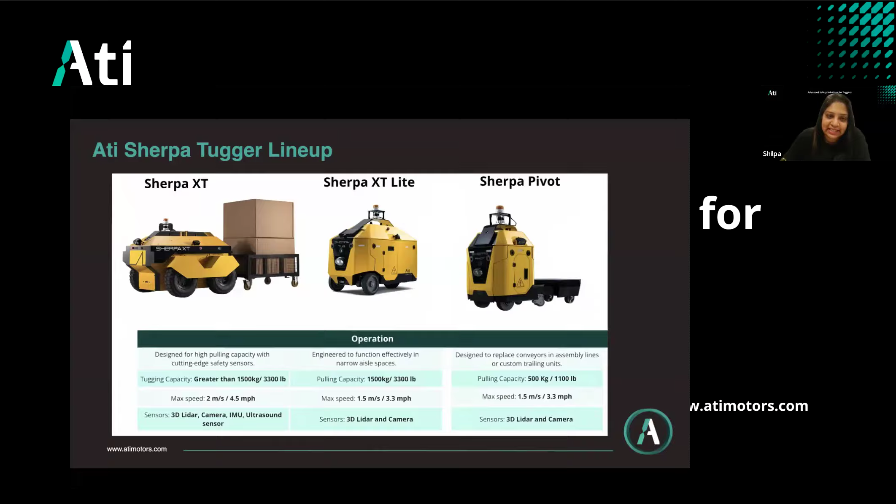Introducing Sherpa Pivot. Pivot is our mini tugger, which can handle a payload of 500 kgs. And Sherpa XT, can you hover over XT, Suprotim? This tugger will be able to carry payloads of more than 1.5 ton, to be precise, 1500 kg and greater. Now, with the introduction to our tugger family, I hand over to Suprotim. Please take over.

All right, thank you all for joining this afternoon. I'm going to try and keep it within about 35-40 minutes. Just so that everyone is familiar with the terminology we will use throughout the webinar, I will do a quick 101, including some of the topics we spoke about last time. As Shilpa mentioned, we have a variety of tuggers available in our lineup, and they all run on a whole bunch of sensors.

There's a 3D LiDAR, which is the main sensor that we use for our autonomous driving. But we also have other additional sensors that help clear some of the blind spots that we have, or to perceive obstacles and other things in the blind spots that we have.

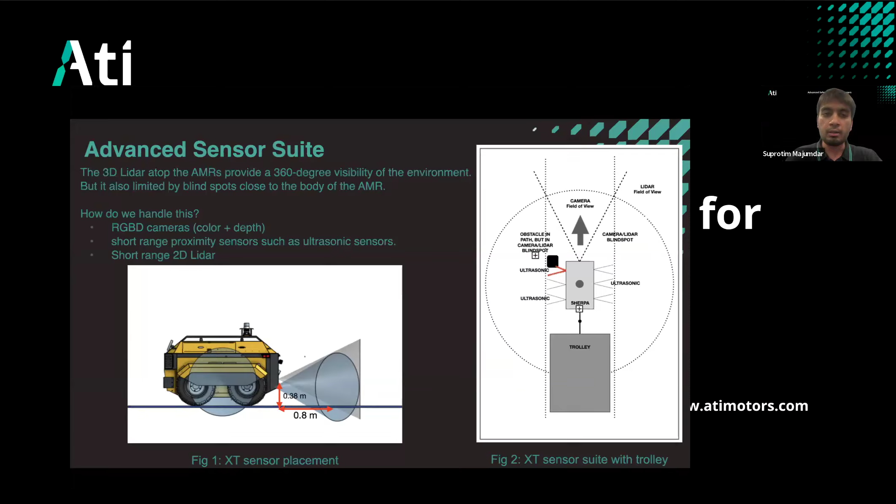Right? And just a brief on autonomy itself. Basically, for any autonomous robot to go about its business in any environment or a factory or a warehouse, we need to answer 3 very fundamental questions, which are: where are we? What is around us? And what do we do next? Where do we go? How do we get there? Etc. Right? So to answer the first question, we need to know where we are in that particular environment.

So with the set of sensors that we have, the 3D LiDAR primarily, we build a map of the environment. And as we move through the environment, we localize, which basically means we take a scan of the environment and match it against the map that we have created. And with some fair amount of accuracy, we know where we are.

Then, of course, we need to move. And before we move, we need to know what's around us. Is it safe for us to move? How much space do I have to move? And what other obstacles do I have to deal with when I move?

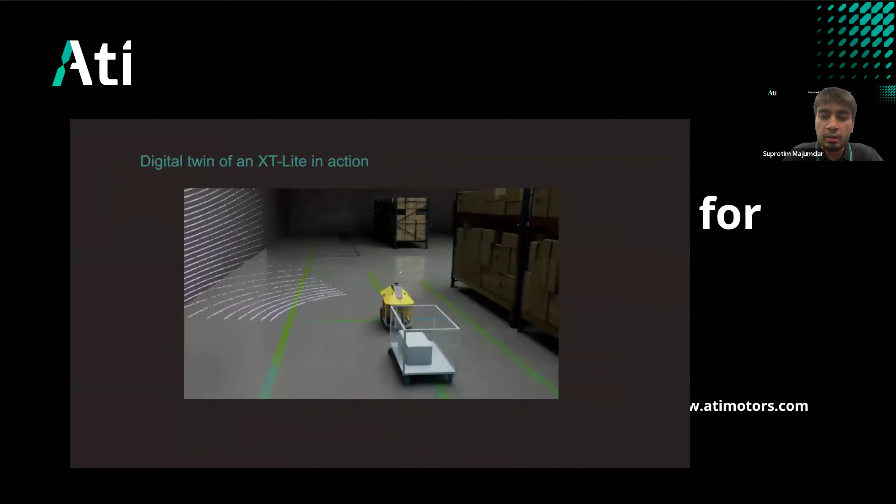All right. Cool. So just wanted to show whatever we talked about in action. You can see the beams of the LiDAR. This is, I think, a 32 beam Ouster LiDAR. As the robot moves, it localizes. It's in this warehouse environment. It's able to perceive all the stacks, the trolley behind it. If you notice very closely, you can even see some vehicle dynamics at play.

This is the Isaac Sim simulation environment developed by NVIDIA. You can see the wheel of the trolley rotate around, so you're getting real world physics simulated as well. This is a great tool that we use to develop our software stack. And you can see the vehicle moving around doing its thing.

All right, so now to the heart of the matter. Tuggers. So what's so special about tuggers? Well, tuggers, as the name suggests, tug trolleys, and trolleys are tough. They provide a whole bunch of challenges. There is a wide variety of trolley form factors that robots have to deal with across environments, factories, and warehouses. They come in multiple configurations.

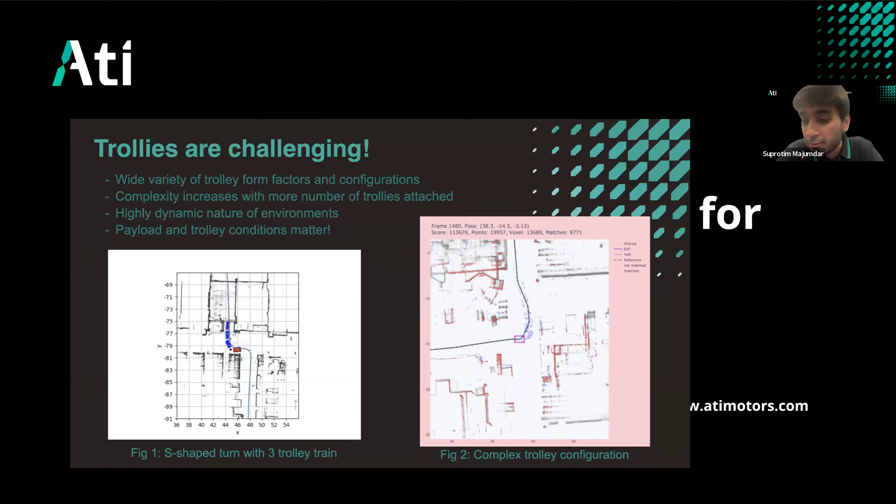Yeah, okay. So in figure 1, just for everyone's clarity, the vehicle is in red and it's pulling 3 trolleys. It's taking this S-shaped curve, and you can see the paths that the trolleys themselves take are quite different from each other. So that itself is quite a challenge. But 3 seems quite trivial compared to the 12 trolleys that we are pulling in figure 2.

So this is 2 rows of 6 trolleys, so a total of 12 trolleys. And you can see, especially while turning, they are taking quite a wild trajectory around the corner. And that obviously is quite a challenge.

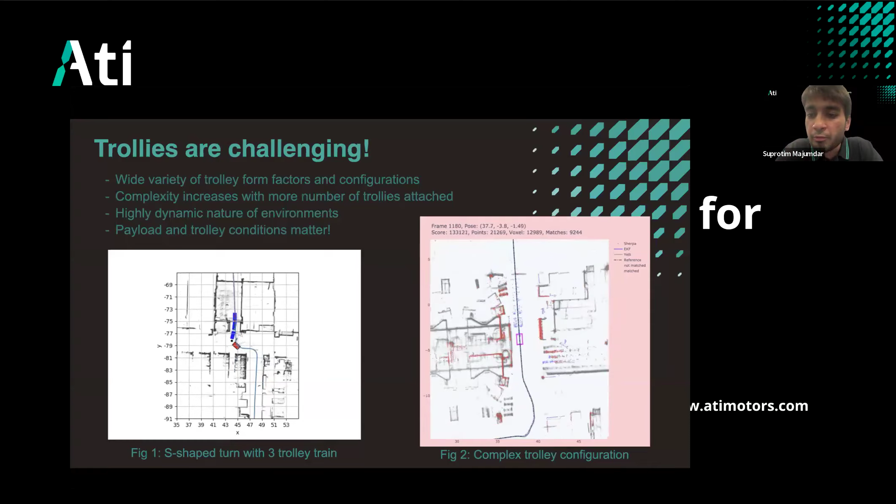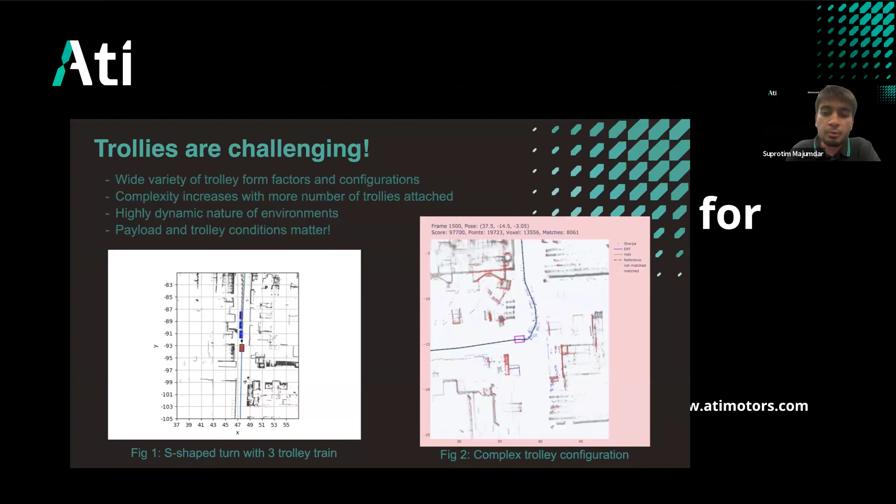And as you can see here, the LiDAR is able to see the first couple of trolleys fairly distinctly. But as you approach trolley 11, 12, I mean, even the third row of trolleys onwards, the set of points are very sparse. So it's difficult to see the trolleys. So these are some of the challenges that we have seen over the years.

So as I mentioned in the last slide, it's difficult to even see the trolleys. And the reason we need to see the trolleys is because once you know where the trolley's position is, that's when you can start to apply some of our safety algorithms, etc. So the first step is always detection.

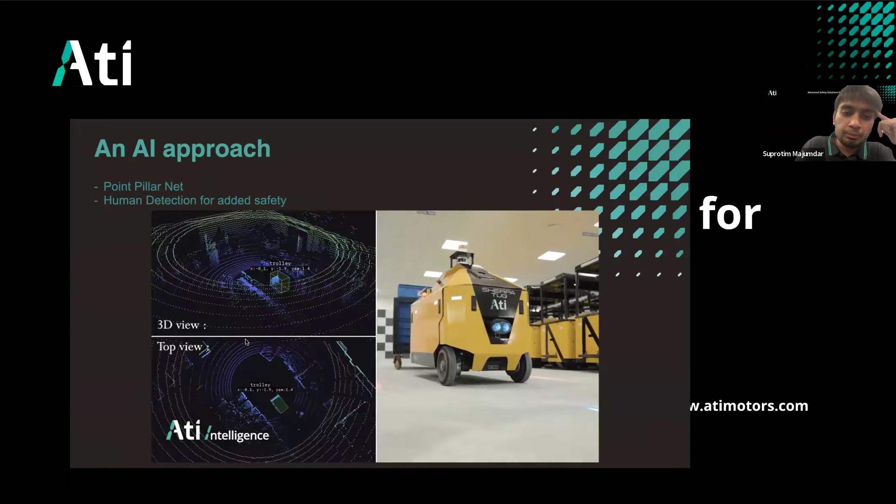So another approach, of course, is to use AI. In this case, we are using a neural net called PointPillars, which is able to filter out noise a lot better, and it is able to classify these trolleys a lot better than a simple scan match could. Because for the scan match, I need to know certain details about the trolley mask: the length and width, the signature of the trolley. Here it is a little more generalized. That is the beauty of AI and ML.

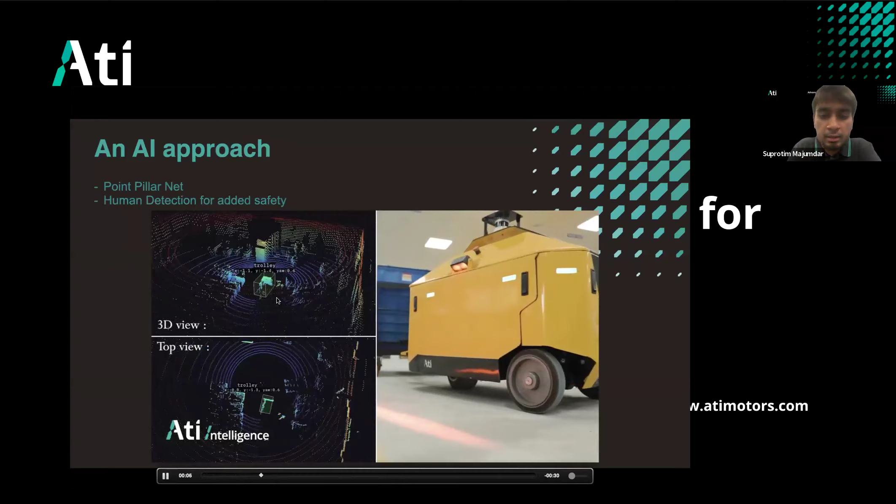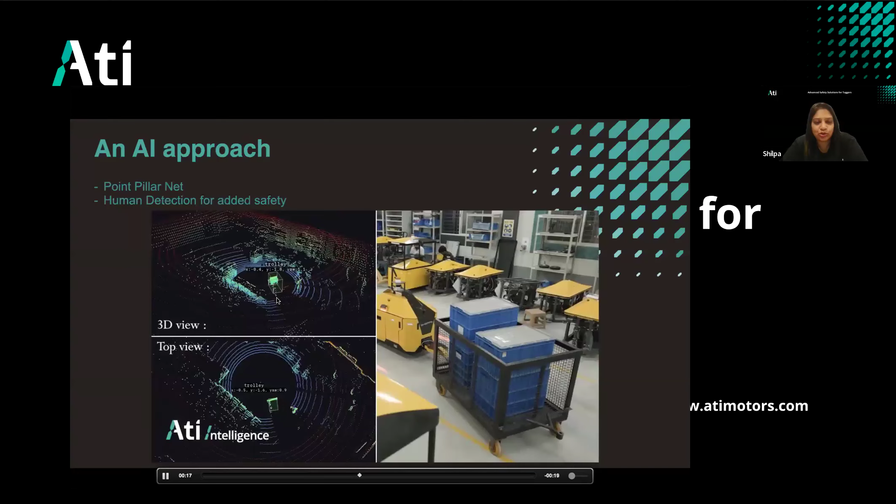So here you can see that it not only does a great job of detecting the trolley, but it is also able to classify the person as well, the human. So it is able to do human detection as well. The benefit of that is we can change the behavior of the vehicle, or adapt the safety layer of the vehicle to be more cautious if there is a human seen near the trolley. So all these red marks are not just obstacles; it can also detect which is human and which is just an obstacle.

So whereas in the last slide all you see are a bunch of lidar points, here you are getting a nice bounding box of the objects that you have been able to classify. So you can classify a trolley versus a vehicle versus a cart versus a human. That gives you a lot more information. It gives you semantic information. So now you know not only that there is a bunch of obstacles there, you know what that obstacle is.

And that allows us more freedom to apply other techniques to be safer and to be more efficient in terms of our path planning. That's wonderful. Okay. Right. So I'll just show you a top view and a side view of the same. You can see that there is a convolutional neural net that we use. That is the backbone of PointPillars net. And it just takes in point cloud data from the LiDAR, and it spits out whatever it has classified. So trolleys, carts, humans, etc.

So you can see here that the person has come between the vehicle and the trolley, and the vehicle immediately stops. Yes. And then once the person is gone, it goes about its business again. Okay. All right.

And so now that we have looked at trolley detection, what do we do with that? We have to do something, right? So first and foremost, if you do see that there is an obstacle that the trolley is expected to hit, you probably want to take the safest bet and stop. So if you look at figure one, you can see again in pink, the vehicle is moving along a certain path. And behind it is a much wider trolley that is in the yellow boxes that you see. And you can see a big black circle. That is an obstacle that we have detected.

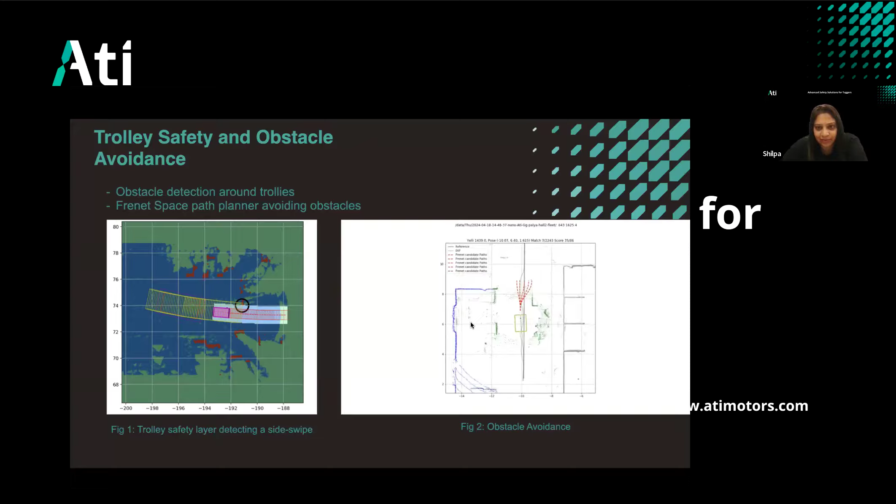So the path is a straight line path. It is just going north to south and back. And there is some box kept right now to its left-hand side. So it just detected that and it was able to find a feasible path around it, a safe, collision-free path around the obstacle. Okay. Right. And you will see the same here.

So basically, like I said, there was a straight line path that was predetermined for the vehicle to follow. But as and when it sees an obstacle, it has a bunch of paths that it basically optimizes over in terms of obstacle distance and of course kinematic feasibility, and it chooses the optimal path to get around the obstacle. And when it is free, as you can see in the video below, it rejoins the path.

So here you can see that it is tugging a fairly largish trolley and gets back only when the trolley is safe around the obstacle. So it goes on for a few meters and then rejoins the path back. Right. This picture is clearer; it added more clarity to the previous slide. Yeah. I think the previous slide didn't have a trolley, and this one has a nice distinct trolley that you can see. Correct.

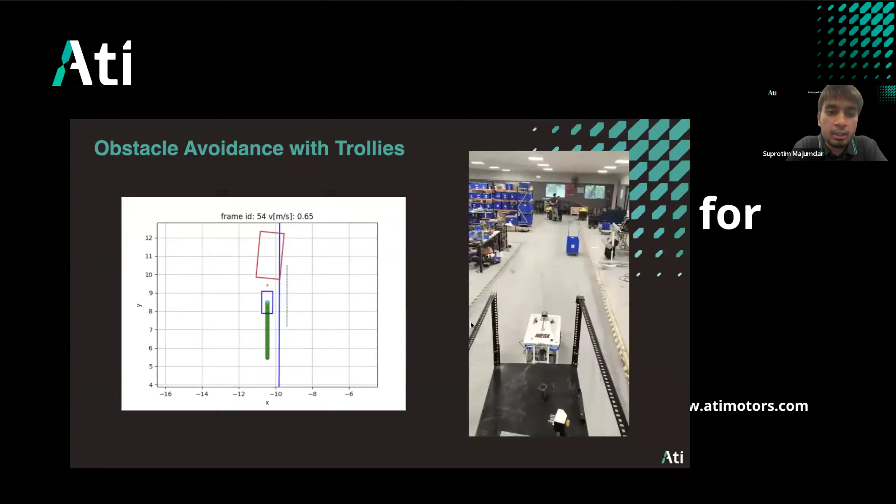All right. So here's our testing facility in Bangalore, along with a visual representation on the side. You can see the trolley is much wider than the vehicle, but the vehicle is accounting for the trolley and making its way safely around the blue box that has been placed in the path. Yes.

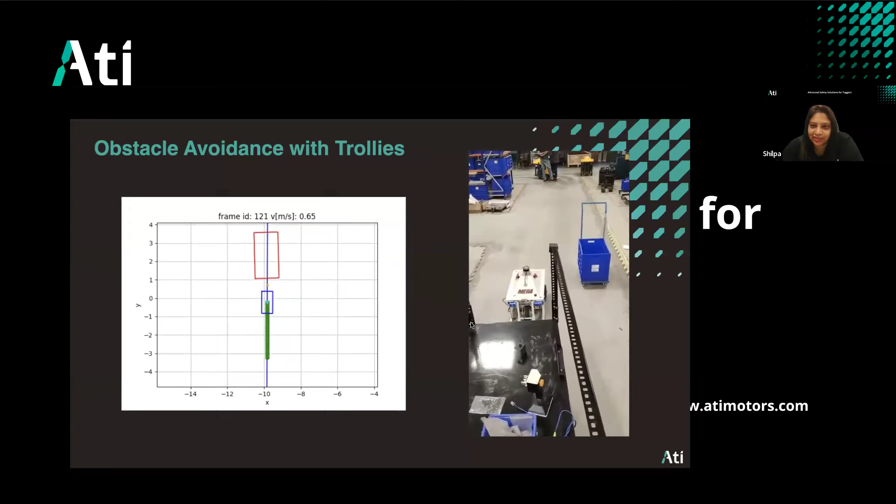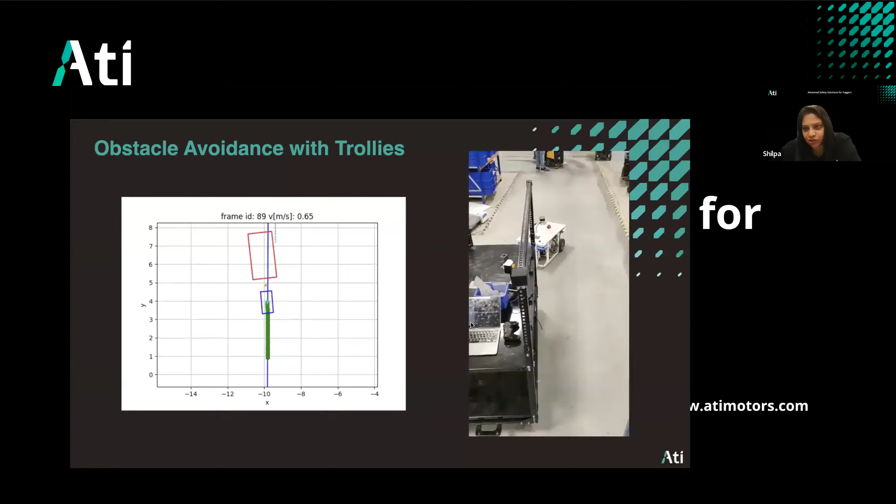So good. Right. So, any questions about obstacle avoidance and trolley detection? Yeah, I do have some here. If something comes between the trolleys, then what is the safety precaution for the same? I think we just saw in the video how a guy came in between the trolley and the vehicle. Okay, here this guy is asking between the trolleys. Yeah. All right.

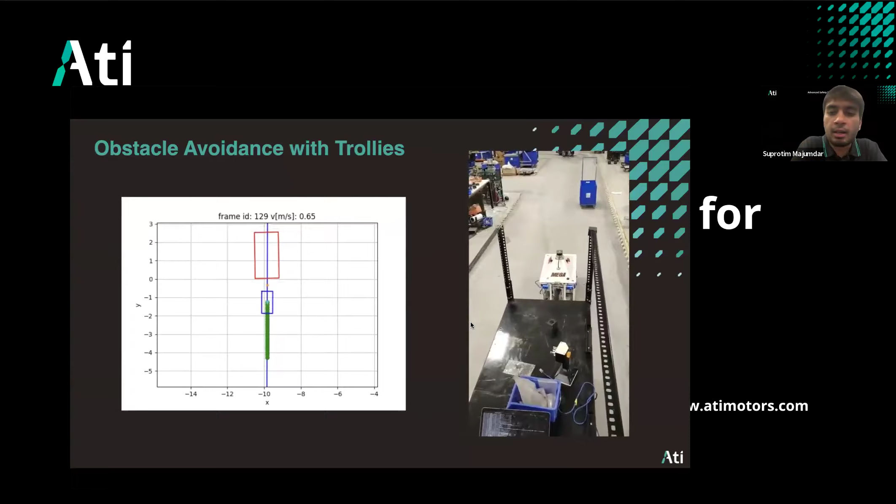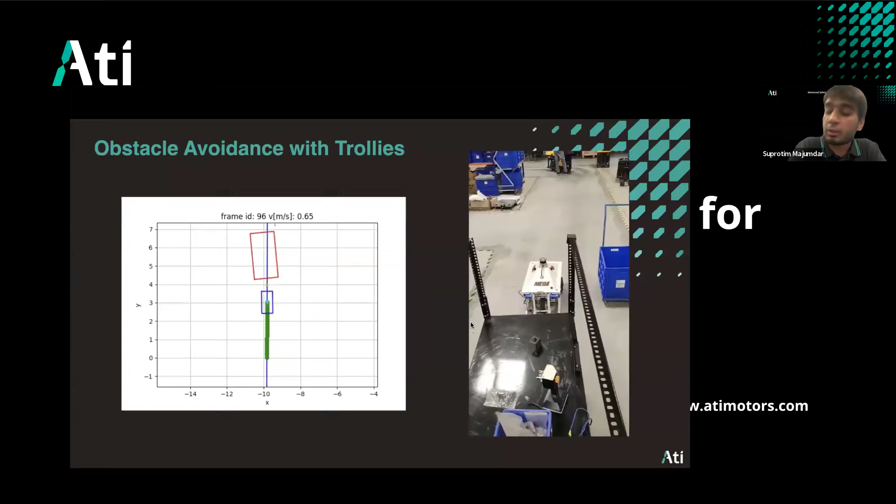If you are able to detect the trolleys, let's say you have three trolleys and you know exactly where the three trolleys are, let us say the lidar is able to see all three trolleys, then you know what the trolley's bounding box or the mask is. And any point seen between those masks, provided of course that the lidar or any of the other sensors see it, it will be able to stop, right? But in the case that, let's say, the first trolley is opaque and it's quite big, the lidar may not be able to see around it, right?

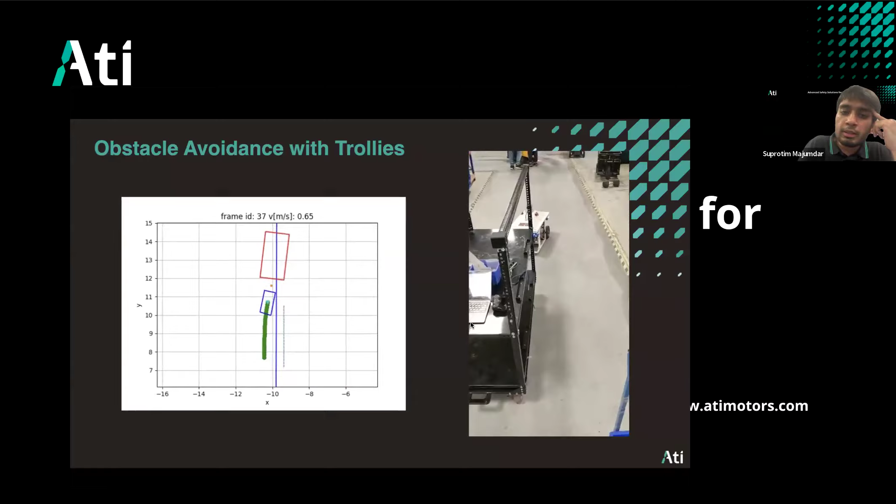So in that case, you probably need to add additional sensors either on the robot, or as I will show you in this slide, you may want to instrument sensors outside of the robot, perhaps at critical intersections where you expect multiple robots or a lot of human footfall. So here you can see, we call this Ati Eye. This is our latest. Yeah, so we have worked on some of these sensors, which are not only internal and on robot, but we have ATI and several other plugins which actually help in detecting between trolleys, behind the trolleys, etc.

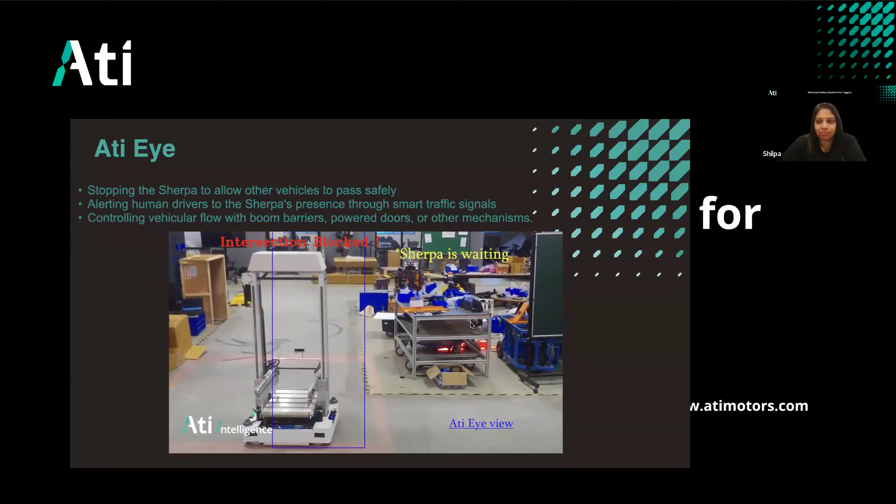Yes. So here, I'll play the video again. You can see that the camera is placed atop the wall at this critical intersection. And the camera detected a foreign robot approaching the intersection. Now, of course, you don't want to risk the foreign robot hitting the vehicle or the trolley, especially if you have minimal observability around the trolleys. So you could rely on the AI to tell you that there is another robot, let it pass. It's kind of like a virtual traffic signal. And once it is safe to do so, you can proceed with the trip, right?

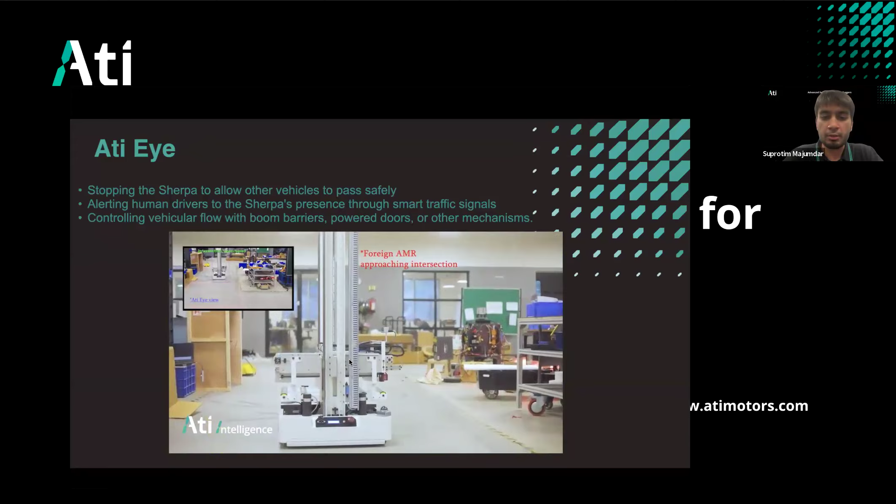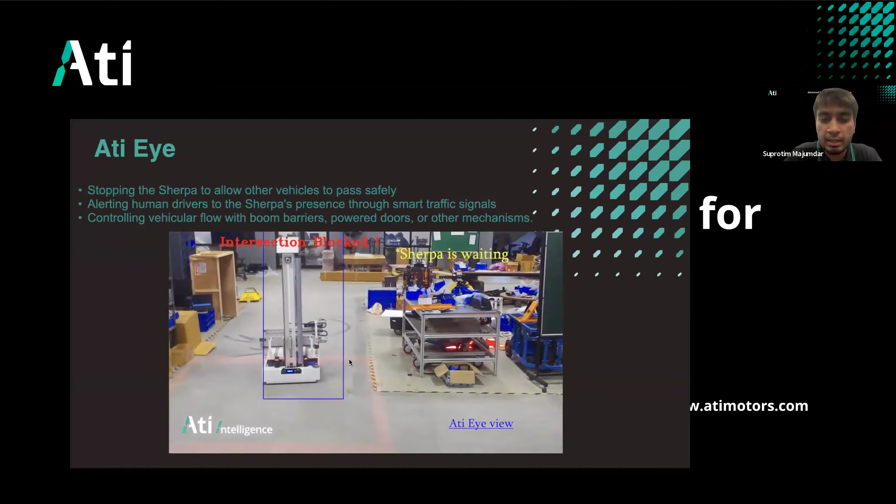Yeah. Then we have one more question. How can data-driven insights from advanced safety systems improve operational efficiency while reducing accident rates? Yeah, so accident rates, of course, the trolley detection kind of speaks for itself. Not only do you want to account for collisions with the robot, but you want to make sure that the trolleys don't sideswipe boxes. These could be critical payload either on the trolley or lying around in the facility. You don't want to damage any goods, of course.

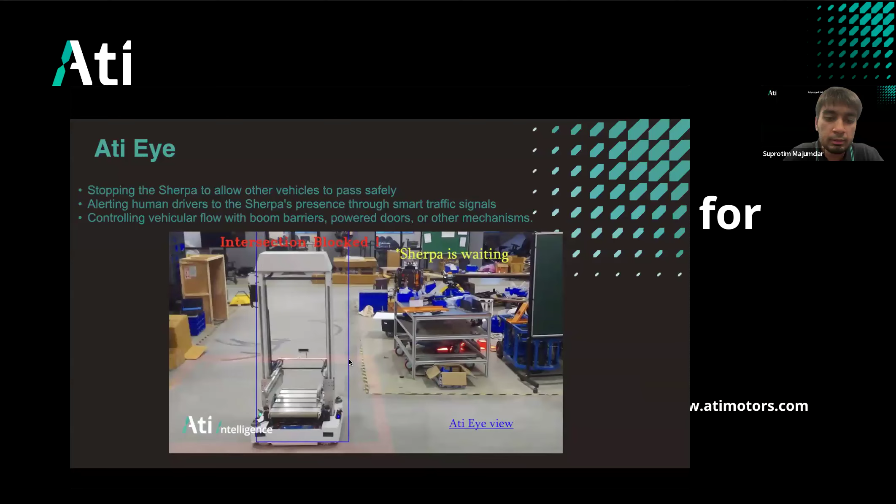And obviously safety first when it comes to humans who are operating in these factories. You don't want to get close to sideswiping anybody. So obviously this suite works, but with the added benefit of obstacle avoidance with trolleys, you can also maneuver around them safely, and that will improve your takt time of the robot's missions and the material movement as well. Yeah, and so we take all these readings, we analyze them, and we try to find solutions. If we already know how to correct it, we do; if not, we try to get new solutions, because we have our Suprotim there, right?

Okay, we have one more question too. We have a few questions. Sure. You want to take it now? Yeah, we can take some right now. It's kind of like half time.

So this is like the same question, in between the trolleys and behind the trolleys, the answer is the same. It's Ati intelligence. I'll read out the question. When a man stands behind the robot on the edge of the trolley, will the robot start or not? So it's about restarting. As you can see, it really depends on the fidelity. At least if you look at the point pillar solution, it is pretty good at classifying the trolley apart from the human, right?

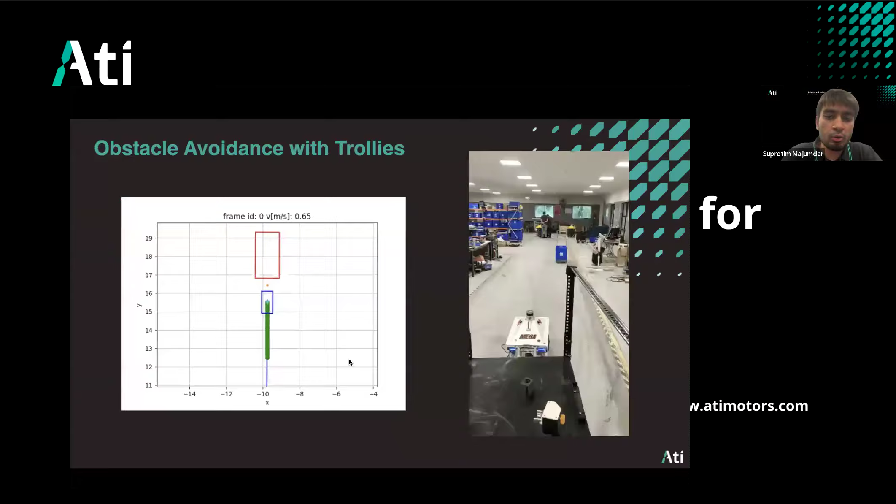So you saw in the video, maybe I can just go back. The human does come pretty close to the trolley, he's almost at the edge of the trolley, and it is still able to classify pretty well. In fact, the person is interacting with the trolley by the looks of things. So this is able to do a pretty good job. And again, if you have a pretty good estimate of your trolley mask, you will be able to distinguish.

And as I mentioned here, we're running a lot of filtering techniques. We're running a Kalman filter here, so that will make sure that you are not too sensitive to noise around the trolley. Yeah.

Now, one more question. How do you balance the cost of safety technology with the long-term value it brings to your organization? Yeah. So cost is usually not something that I deal with too often. I always am in favor of the nicer, more expensive sensors. Safety first, obviously. But I think

in today's day and age, these sensors are only getting cheaper and cheaper. So now we can afford to have a gamut of sensors on the robot, which you may not have been able to do 10 years ago, let's say. Yeah, but then we are always using the futuristic sensors like 3D lidars, when most of the people are still using the 2D lidars and all that.

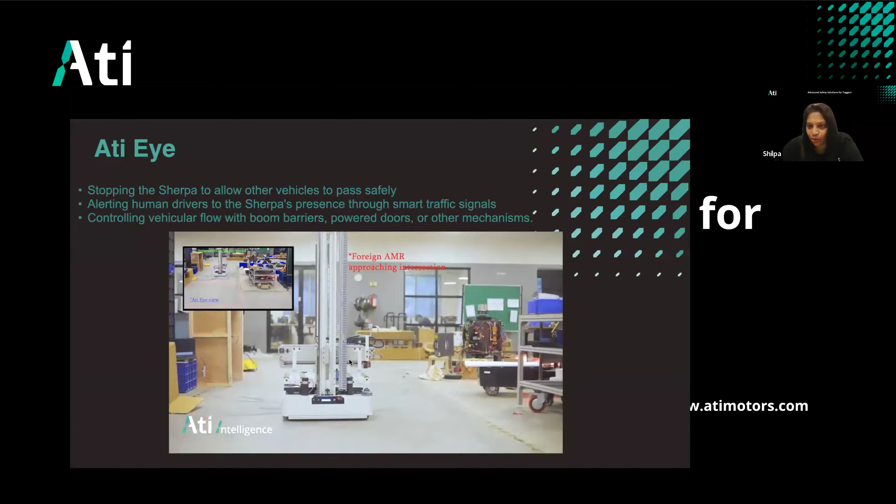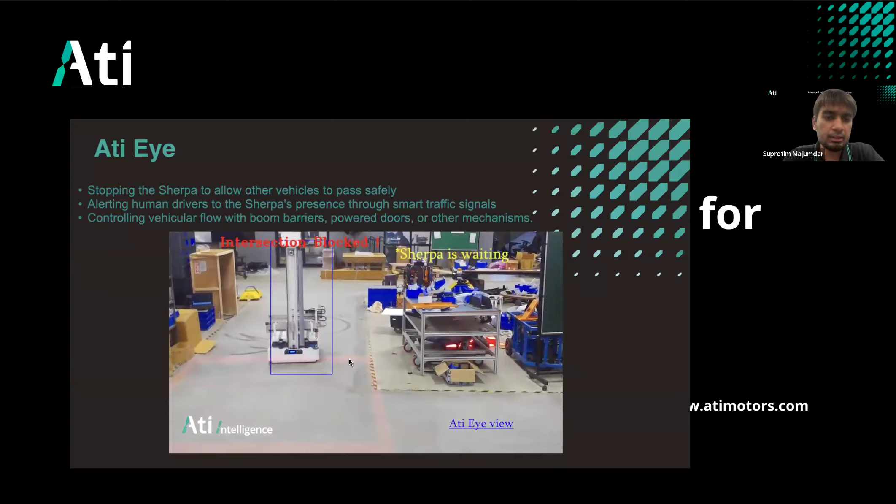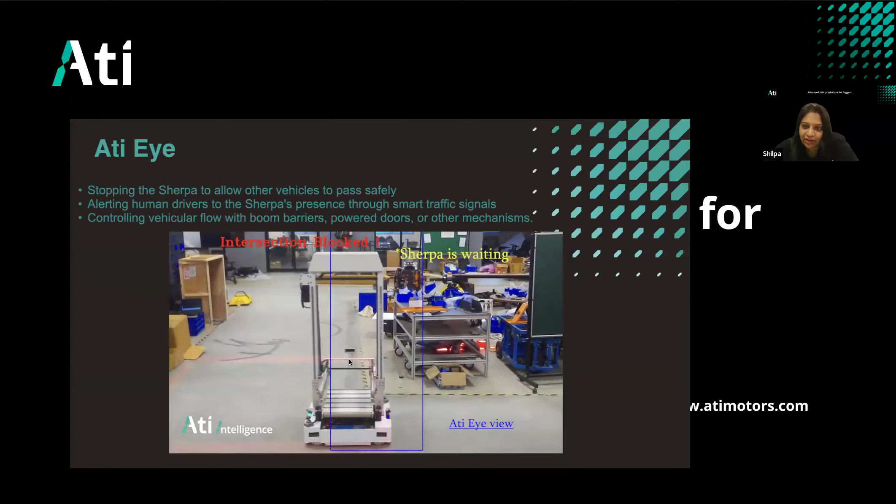Okay, then I do have three more questions. A couple of questions from Mukunda here. When you mention industrial safety regulations, do they also include software safety guarantees? Just for comparison, the automotive sector uses standards like AUTOSAR that put specific constraints on the entire software chain, from sensor processing to inference, to call a system safe. Are there specific software safety requirements to be met to be considered deployment safe in warehouses? That's the question.

Yeah, so AMRs also have their bunch of certifications. There is a CE certification standard, ISO standards for AMRs. For example, sensor redundancy. For encoders, the certification mandates that you have additional safety sensors in case one of the encoders conks out, as a redundancy. And they also have standards in terms of braking distance for when you perceive obstacles. They need the vehicle to be within a meter or so of any obstacle that it has perceived. So yes, there is a set of standards that are being followed.

I think there was a very recent update, perhaps a 2024 or so update to these standards. And then we are getting them certified too. Yes, it is actually.

And the second question from the same person is, when using AI-based inference to make safety-related decisions, how do you guarantee determinism and explainability of these models? Yeah, that's a great question. That's something that you always have to take with a pinch of salt when it comes to neural nets and AI. But that is where other sensors, and not just other sensors, other techniques, come into play. Although the AI may say that it is safe, the other sensors are still running to make sure that you are never going to collide.

So those are more classical techniques which are deterministic, right? The AI is giving you some sort of hints, at least in terms of semantics, but your sensors are still running in terms of what you see is what you get. So it will never make a faux pas in that regard.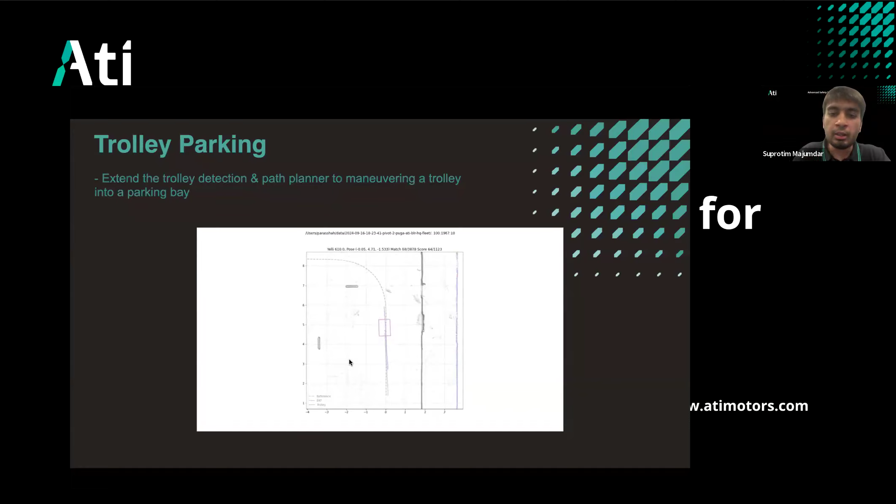Right, so this will definitely add value to a lot of folks in perhaps warehousing or manufacturing, where you may want to cover this last mile of getting the goods from the trolley into, let's say, a packaging or the conveyor line. Here, the vehicle itself can drop it wherever you consume the material on the trolley, auto unhitch the trolley and move on to the next trolley. So you could potentially see hundreds of trolleys being picked up and dropped at the final destination with this algorithm.

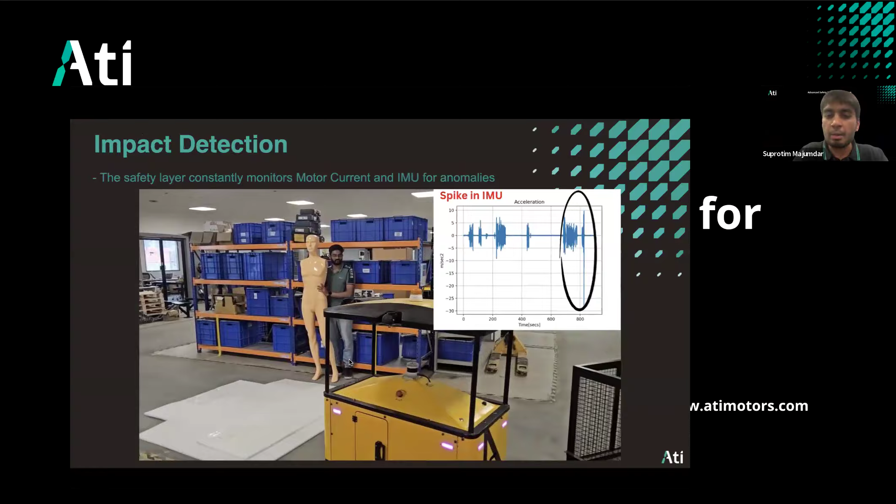Right? And we spoke a lot about preventing collisions, but bad things happen. That's the nature of reality. We want to make sure that we do not aggravate anything that we may happen to hit or something that happens to fall onto the vehicle or the trolley. So this is an impact detection algorithm.

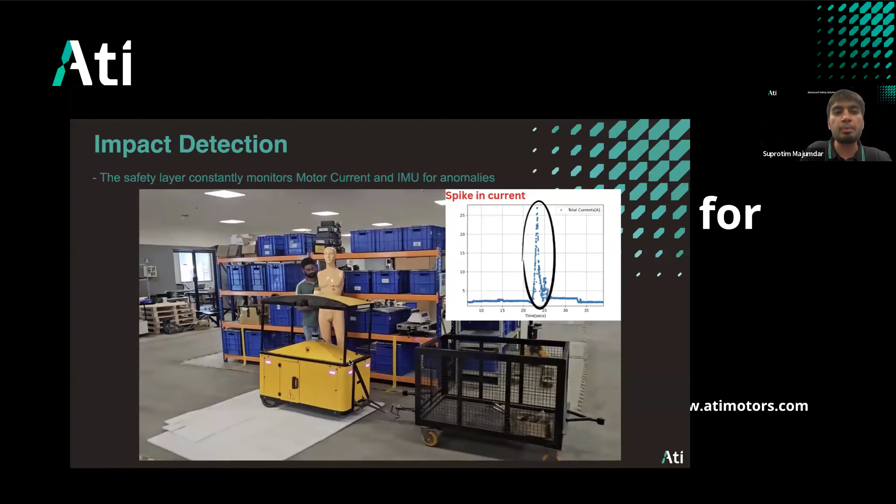So this is where a couple more sensors come into play. You have the IMU that detects a spike in the vehicle's movement. And there's also a current sensor that we use to gauge a spike in current due to the extra load of the impact. The vehicle will detect these anomalies and it will stop. It will make sure that it does not aggravate this impact at all.

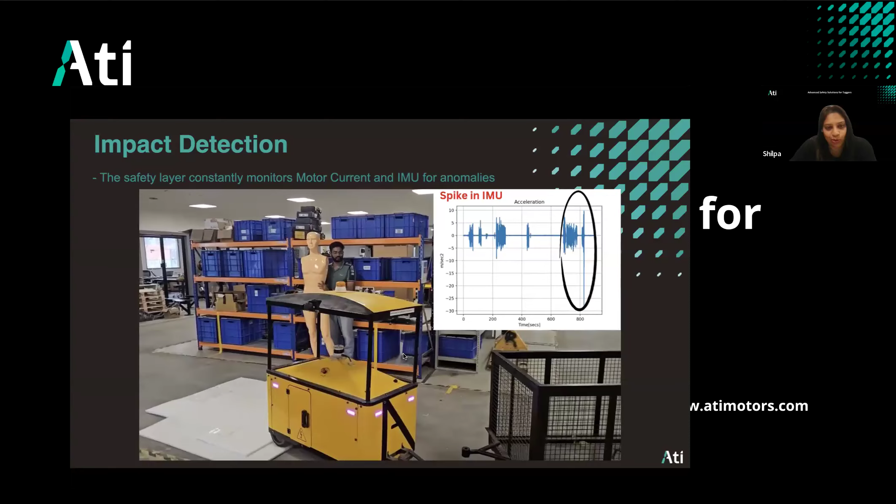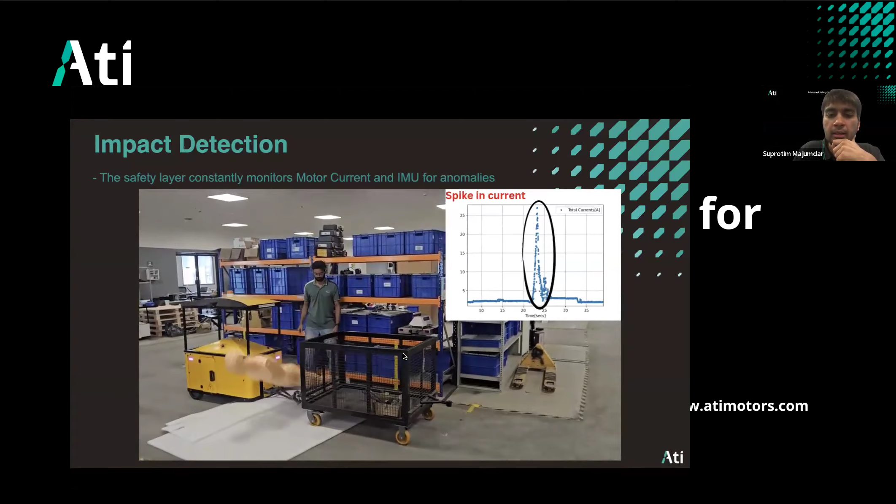Yeah. So we are working on it already. Since this is a slow-mo video, it looks like there is a latency, but the vehicle stops immediately, doesn't it? Yeah, this is in real time. You can see that there is a fairly large spike in current compared to the normal operating currents in the vehicle, and we stop.

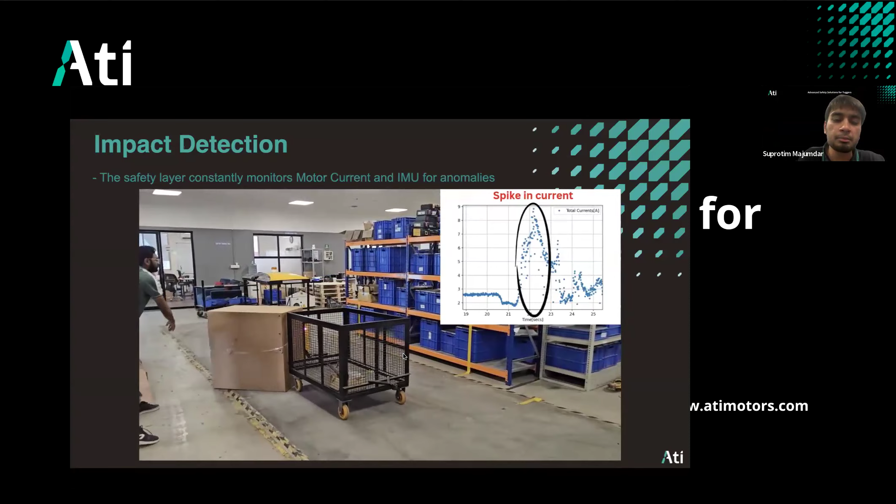We want to make sure that in the odd chance, and that's a very small chance, that something does collide into us, we do not proceed any further. It's always safety first. Okay. So these were some of the challenges that we face. When you load the trolley, dynamics do come into play. The heavier you get, the faster you get, the more the trolley becomes a factor in terms of the vehicle's performance.

We also saw that you are often bound by the observability of the sensors around the vehicle and around the trolley. And these change from site to site or factory to factory. There are a lot of dynamic environments with a lot of clutter, a lot of vehicles or human beings working. The trolleys themselves may be very different. The trolleys may degrade over time. The wheels may pick up loose material and become stuck. The trolley chassis may be lopsided, and the weight distribution becomes imbalanced.

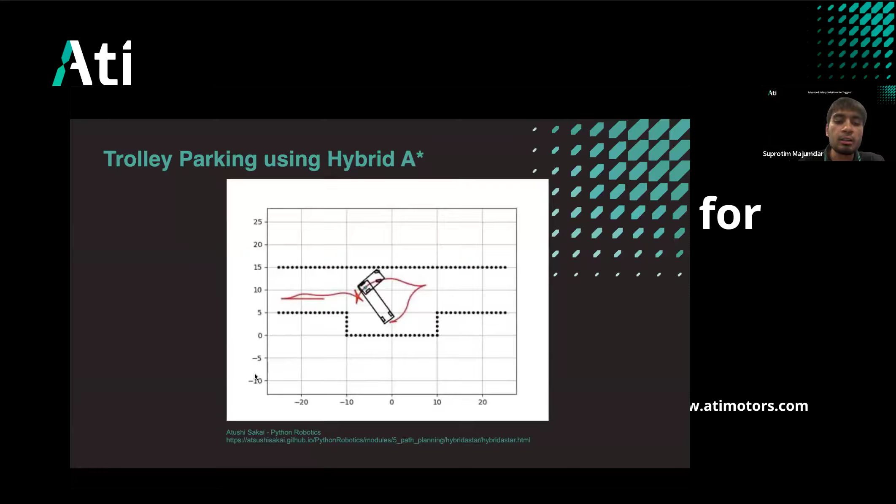Go ahead. Yeah, so we had initially looked at a trolley parking problem, but this is a little more dynamic in the sense that the path that we had given in the earlier instance, a few slides back, was a predetermined path. But here you kind of want the vehicle to figure out how to park on its own. So let me just play this a little faster.

So here you can see there's a small vehicle that is trying to park a very large, long trolley into this narrow parking bay. So it has started off on the right-hand side of this lane, and it is able to park. Now let's say things have changed and it needs to approach from a different angle or a different position. It will adapt around the environment that it sees. So it figures out a path based on the environment and the conditions, the space around it, basically. So you'll see here that it's able to figure out a sharper path to park the trolley into the bay.

And I think the next example is even more outlandish. Now it is approaching from the eastern side of this lane, and it is now going to do a 3-point turn, but it has figured it out on its own. So this is a search-based planner. It basically searches based on some motion primitives around the space available, and it figures out the path that the vehicle and the trolley need to take to safely park. So now it has flipped around, and it is now able to comfortably park.

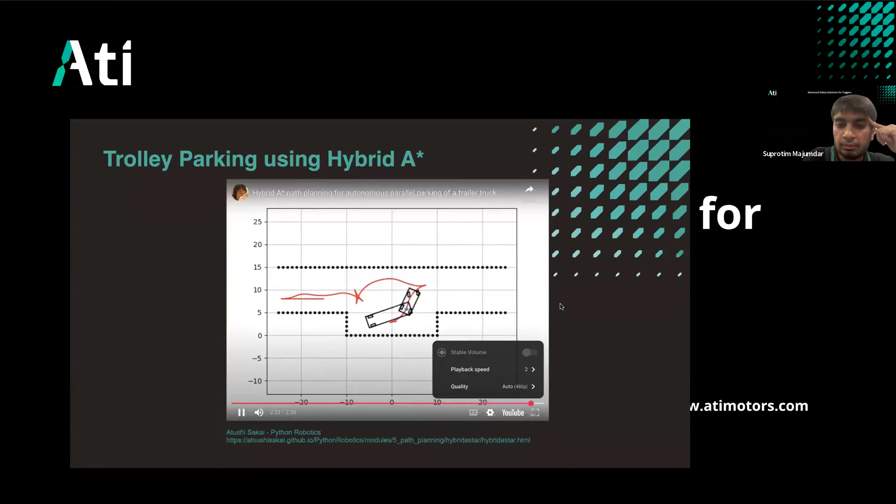All right. And yeah, that concludes some of the cool stuff that we have been working on and are continuing to work on at Ati Motors in terms of trolley safety. The floor is open for any questions that you may have.

Yes, so we have one more question. This is regarding the impact detection. Do the IMU and current spikes suffice to distinguish actual impact versus minor bumps on the floor or perhaps slopes? Yeah, that's a great question. We are filtering out a lot of that noise. So we are making sure that the spikes that we see are indeed true positives. So we are running some filtering on top of that. But you are right, these are the environmental challenges that we have. How do you differentiate between the trolley wheels getting stuck in a small crevice on the ground versus some 50 kg box falling between the vehicle and the trolley?

So that's a great question. We do annotate maps in terms of features that you may come across, like ramps. So you may be able to tweak your algorithm based on the knowledge that you are on a ramp. You can also infer that you're on a ramp using the IMU and gyroscope. We can infer that, hey, there's a bump coming ahead using a neural net. You can say, hey, I expect a bump to be there, let us tweak the threshold for the current spikes accordingly. So there are a lot of techniques that we can use to get around some of these environmental challenges.